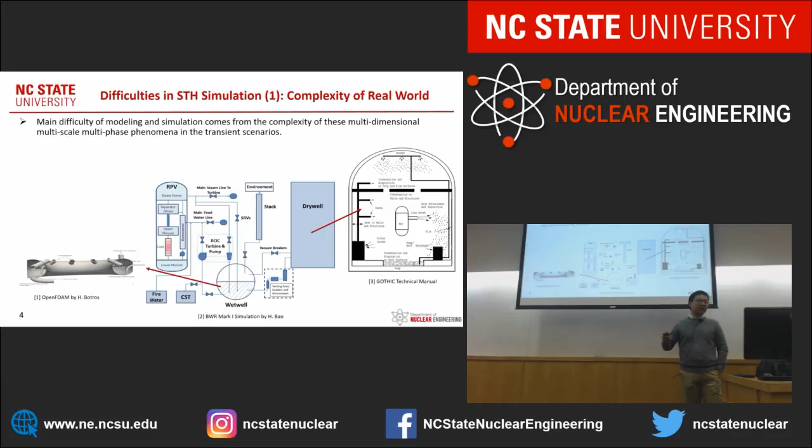As we all know, there are some difficulties for system thermohydraulic simulation because the world is complex. We have different components, multiple dimensional, multiple scale, and multiple phase phenomena in the transient scenarios for nuclear power plants. There are so many phenomena, some of which we have not fully understood. So it's very difficult for people to model and simulate every detail in nuclear power plants.

We know there are some ideal approaches to explore and predict the behaviors in the plants. The first one is that we can build many full-scale facilities to do the experiments, so we can use the experimental data to develop different models, then use these models to make a code and simulate the plant. But actually it's not easy to build so many facilities because there are so many phenomena we need to know - it's not affordable for people to build so many facilities.

So there's another approach called direct numerical simulation, where local information can be fully solved accurately with a very fine mesh, but it's computationally expensive to deal with system simulations because we have so many components and it's a long-term scenario.

So people start to use scaling methods to design different scaled facilities for different phenomena. Based on experiments using these facilities, we generate different models, integrate all the models into a code, and use this code to simulate the full-scale prototype processes. But we know there are some problems generated - scaling issues, because we need to scale down from full scale.

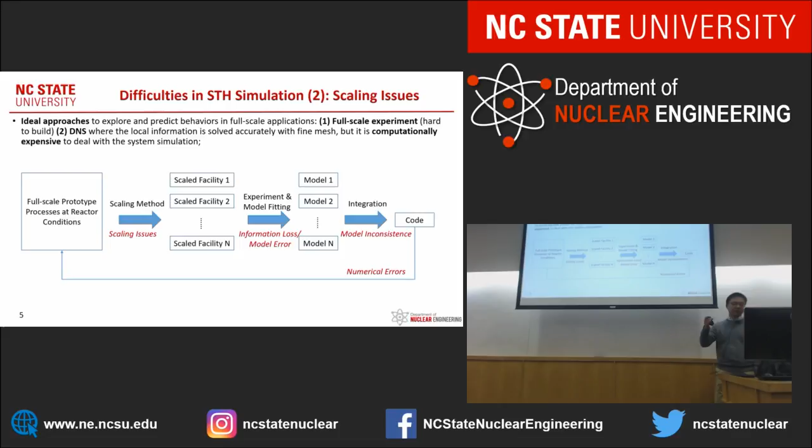So that's one of the motivations to use machine learning to help us deal with all these problems, because it's not easy. There's another problem - the lack of validation data.

Before we try to use the code for modeling and simulation, we need to make sure that this code or model is accurate enough for our prediction. That's why we need to generate validation data to validate the code first.

But normally the validation domain is much smaller than the application domain, because no matter how many experiments you've made or how many cases you've run, the application domain is always larger. If we only change a little bit on the geometry or boundary condition, the application is totally different from the case you have.

So that's another motivation - we're trying to think of another way that maybe we can just enlarge the validation domain a little bit so we can have more confidence in the prediction. And that's what machine learning can help us with.

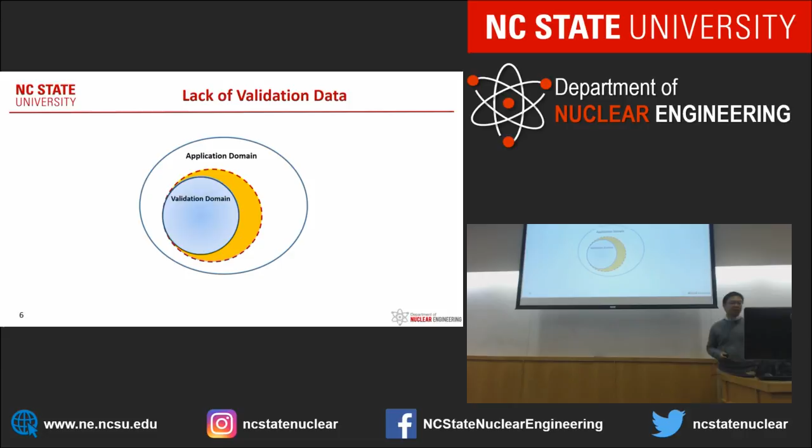We already have different codes for system thermohydraulic analysis. We have lumped parameter codes such as RELAP5, some of you may have experience with it, and also CFD codes such as STAR-CCM Plus, and some coarse mesh CFD-like codes such as GOTHIC.

All these codes play a game to make a balance between simulation accuracy and simulation efficiency. So people have to make a choice between accuracy and efficiency. But we are greedy, we want both.

That's why we need machine learning to help us improve the code, to estimate the error from the code.

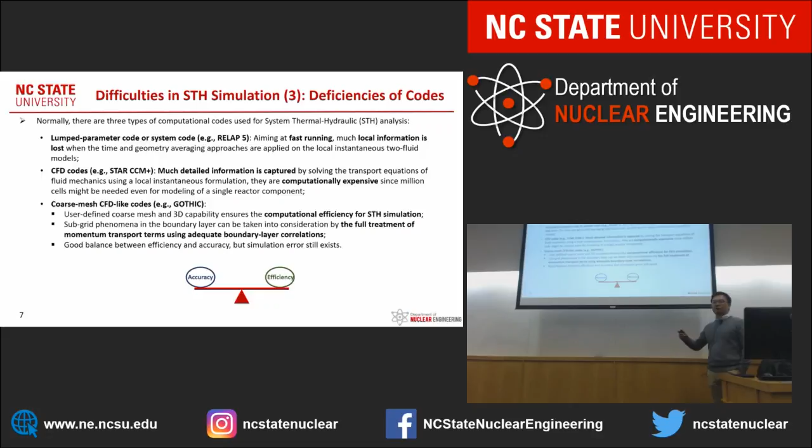When we have a target to simulate, we need to decide which kind of mesh or model we should use. Normally we make a decision based on our experience, but normally it's wrong. So we go find experts about this code and ask them which mesh or model is good for this case. They may give an answer, but they're not sure either.

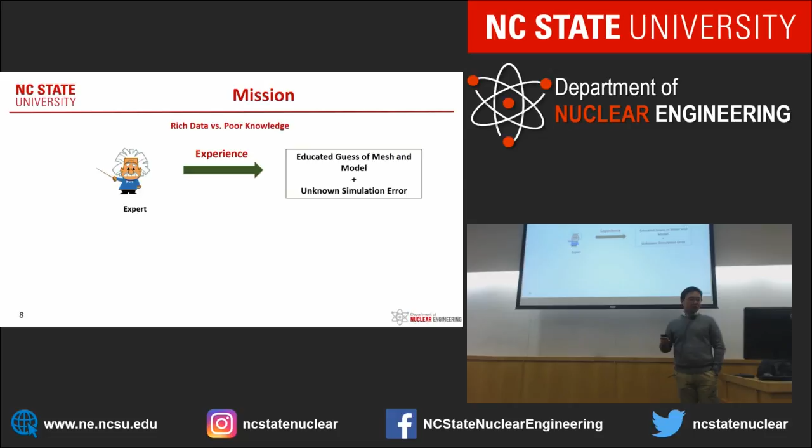So we're trying to find another way - we can directly learn from the data and let machine learning give us an answer about how to estimate the simulation error and give a smart suggestion of mesh and model selection.

I have developed an optimized system called Optimal Mesh Model Information System, the OMIS system. This data-driven framework can help us estimate the local simulation error using machine learning and also give suggestions on the selection of mesh size and model.

So we can let these coarse mesh, low fidelity simulations achieve accuracy comparable to the high fidelity data, such as DNS or high resolution CFD.

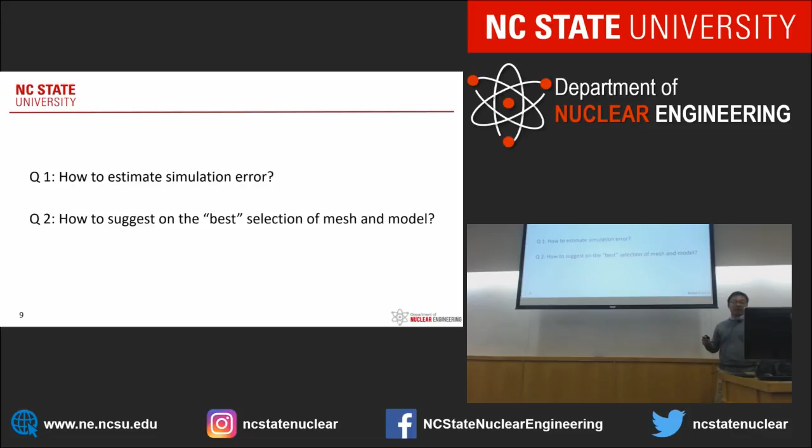So here we have two questions. The first one is how to estimate simulation error using machine learning. The second one is how to suggest the best selection of mesh and model. Let's go to the first one.

Just like what we mentioned before, if we just change a little bit on the geometry or boundary condition, the prediction is totally different from our validated cases. So that will confuse people.

All these changes on dimension, geometry, boundary condition, or non-dimensional parameters can be considered as a change on the global characteristics on the target case, because it's not in detail. It's globally defined.

But when we go to the detail, we may find something similar. For example, for different types of plants, we have different light water reactors, such as boiling water reactors and pressurized water reactors. No matter how the boundary condition or geometry changes, the game inside the core is always the match between the liquid and the vapor.

So we can find the similarity there because it's always steam, it's always vapor and liquid. So based on the global characteristics and the local physical features, we can separate all the conditions into 4 types, which is called GILI, GELI, GILE, and GELE.

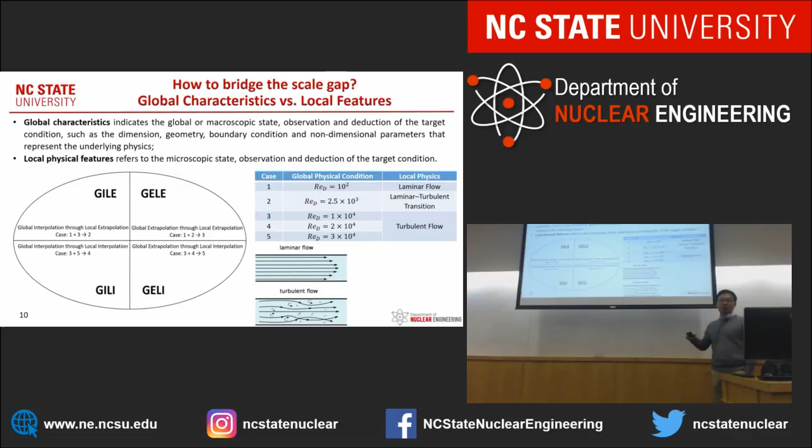So that's one way that we can enlarge our validation data, because we are not just focused on the global characteristics. We can go to the local physical features that can help us a lot.

So in the piping flow example, we have explained the interpolation of local physics. But actually, when we go to the statistics, when we go to the data analysis, we can find another explanation about the interpolation of local physics. From the perspective of data characteristics, because we can identify a set of physical features, local physical features, which can represent the nature or the pattern of the local physics.

So if we can find the similarity between the local physical features of training data and test data, we may find a way to bridge the global scale gap.

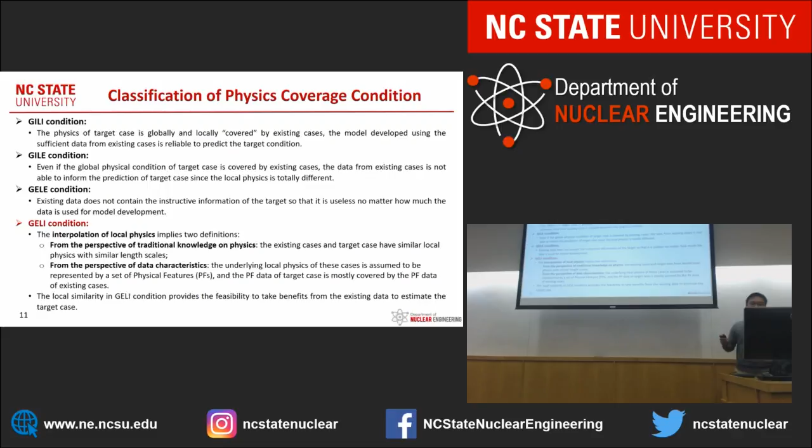So that's a way to bridge the scale gap by exploring the local similarity in the GELI condition. To bridge the global scale gap by exploring the local physics in GELI condition, firstly we need to identify different physical features and build trained data, and use machine learning to find the natural patterns inside data.

This chart is the central idea of this data-driven approach, because in the beginning we just know that the simulation error is influenced by the physics of interest, the model error, and also the mesh error. But because the model error and mesh error are connected by the mesh size, they cannot be estimated separately from each other. So we are trying to define some physical features which also consider the physical parameters, the model information, the mesh size, and then use machine learning to explore the relationship between the simulation error and these physical features.

That's the goal of this data-driven approach. If we can find the relationship between the local physical features and the simulation errors, then we can just insert the values of physical features for a new case. Then we can have a good prediction on the simulation error for that new case.

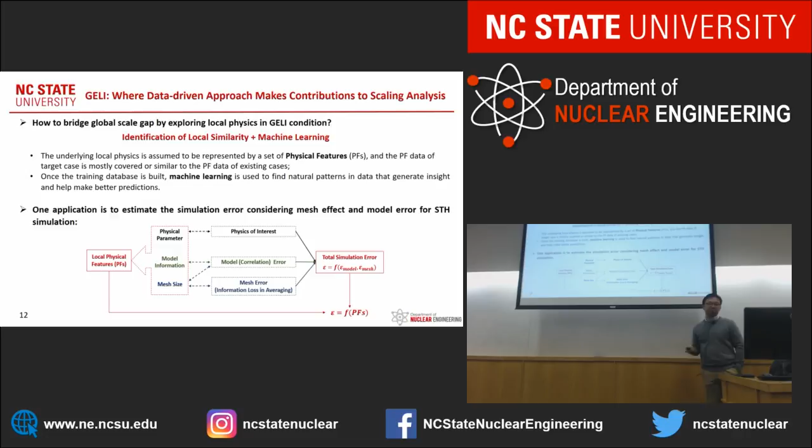Okay, the first step is to identify the physical features. As we said, we need to consider three factors here: the mesh size, the physics of interest, and also the closure models applied. So there are two types of physical features considered here. The first is the local physical parameters, which includes the physical non-dimensional groups and also the parameters involved in the closure relationships. This part enables this data-driven approach the scalability and the additivity of physics.

For example, in the beginning we just consider a very simple case, friction. We can define some physical features for this friction. But when we go further to turbulence, we can still use the physical features defined for friction, and also add some new specific physical features for that turbulence. And of course, when we go further to convection, we can define other physical features related to heat transfer. So that's the first part of the physical features.

The second part of physical features are the gradients of variables, including the first order derivatives and the second order derivatives. We use these gradients of variables. The variables are the quantity of interest, such as the velocities, the temperature, the pressure you care about. The reason we are using gradients, not only the value in the local cell, is that the gradients can include the regional information, not only just one cell, but all the cells.

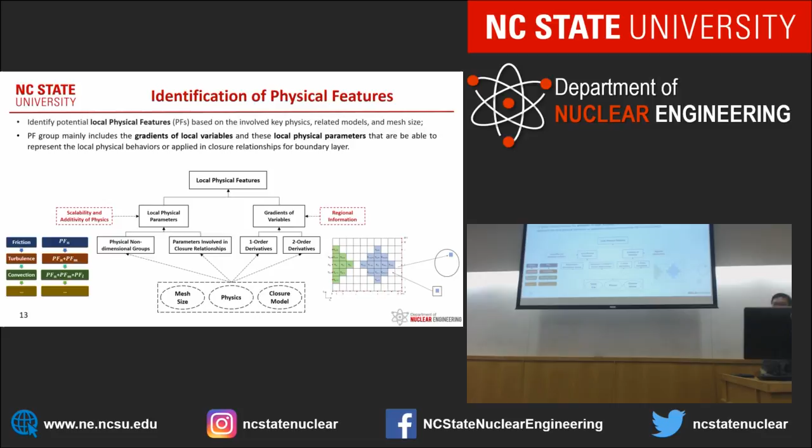All right, so here is a workflow for this data-driven approach. In the beginning, we need to train the error function, so we need to generate the high fidelity data based on some very fine mesh codes, and also we need to generate the low fidelity data from the low fidelity simulations.

For example, we can use some coarse mesh nodalization as a low fidelity simulation, and some fine mesh nodalization as a high fidelity simulation. By comparing these two simulations, we can find the error between high fidelity data and low fidelity simulations. The physics features are totally defined based on the low fidelity simulation. Once we build this training data set, we can use machine learning to train the data and get an error function whose inputs are the physics features and outputs are the simulation errors.

Next step, we need to test this function. We need some more data, which includes the low fidelity simulations and high fidelity simulations. We insert the new values of these physics features into this function, and then we have a predicted simulation error.

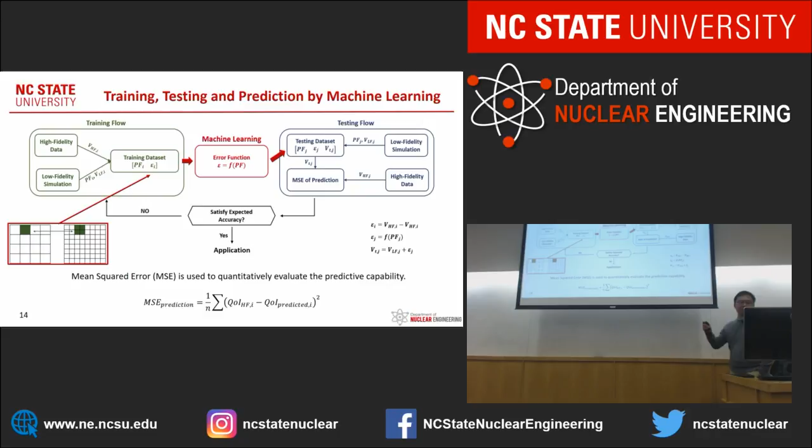Maybe we need more data for training. Maybe we need more physics features. Maybe we need a much better machine learning algorithm for the training. That depends. So that's the workflow and information flow for this data-driven approach.

Next, we're going to a case study. Gothic, which is a coarse mesh safety-like code, is used as a low fidelity simulation. The structure of Gothic includes the conservation equations, the source terms, and the closure models.

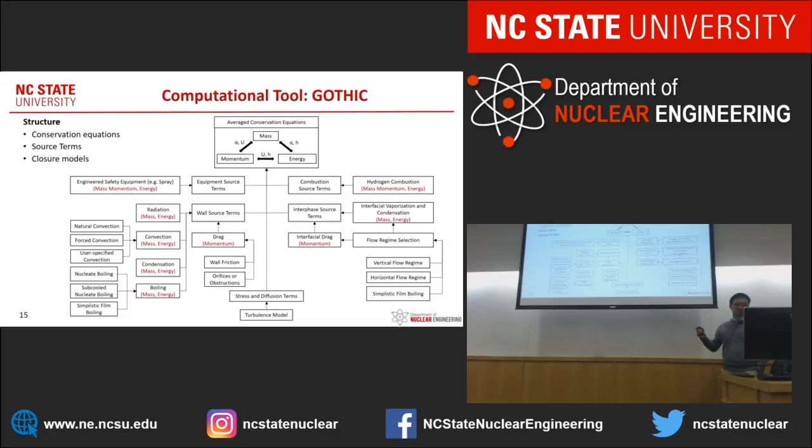Because our case study is about mixed convection, there are three closure models we concern a lot about: the turbulence model, the convection heat transfer model, and the wall friction model.

By reviewing the manual and the correlations, we find that the mesh size will affect the calculations of the model errors, such as the wall distance, the local cell width, the hydraulic diameter, and the wall length. That makes the mesh-induced error and the model error tightly connected.

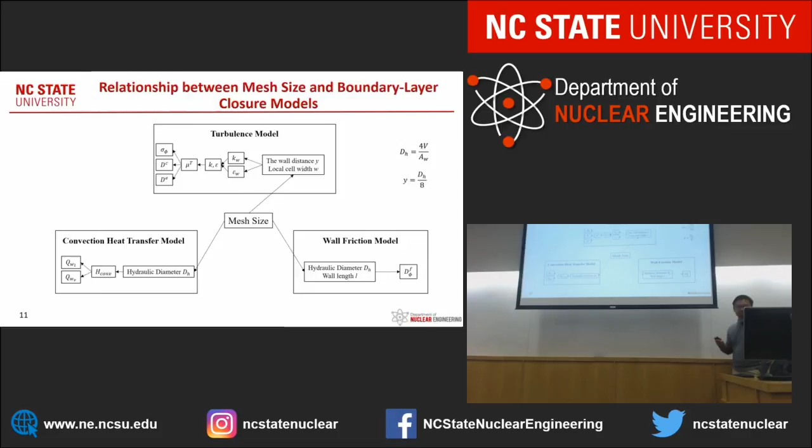The machine learning algorithm we use for this case is feed-forward neural network, because compared to other machine learning algorithms, feed-forward neural network has very good performance to dig out deep nature and patterns. Also, FNN has a capability for deep learning because we can add hidden layers and also neurons.

So it can help us learn from the data and generate insight from the low-level features to the high-level features.

The case study is on mixed convection. Here we have three case studies: the extrapolation of geometry, the extrapolation of boundary condition, and the extrapolation of dimension.

We also have some questions here, because as we know, if we have more data for training, normally the prediction of the machine learning will be better. But normally the similarity between the training data and testing data is much more important.

That's our question. I just said the answer, but that's what we need to explore. The second question is the relationship between the similarity and the prediction error, because we expect that if the training data and the testing data are more similar, the prediction error will be much less.

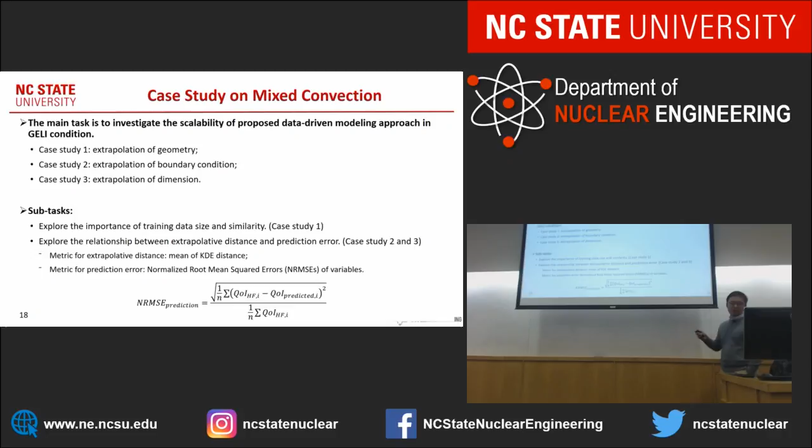The metric for the extrapolative distance is defined as the mean KDE distance. KDE is the kernel density estimation. The metric for the prediction error is defined as the normalized root mean squared error of variables. The equation is right here. Okay, case study 1.

In the beginning, we just have this square control volume. We have the data for this square control volume as data set A1 to A12, with different injection temperature and injection rate at the bottom.

For all the cases, there is a hot air injection at the bottom and a cold wall with a fixed temperature on the top, and here is a vent. So the air will go inside, mix, and go outside.

So this case is what we have for the training, and we are trying to use the data from this square control volume to predict the cases with rectangular control volumes. Here we have two types of rectangular control volumes with different aspect ratios. They also have the hot air injection at the bottom and the vent on top.

So, for this case, first we need to define and identify the local physical feature group.

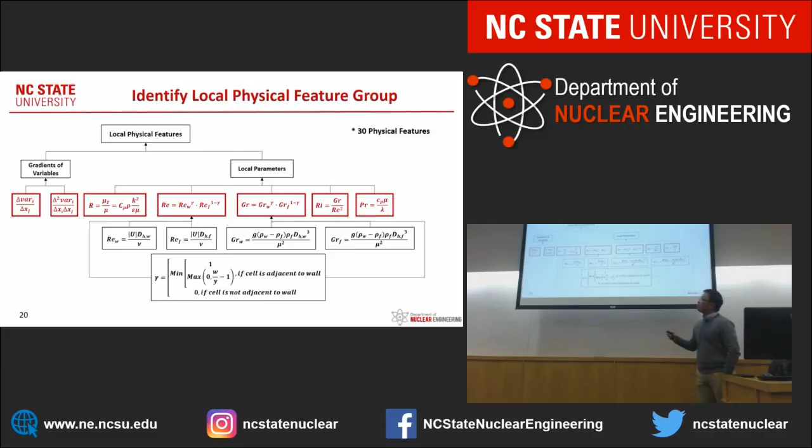Just like what we said, we have two types of physical features, and based on this, we have defined 30 physical features for this case study. All right, here is: for this study we have 4 tests.

The first is that we use all the square data for training to test the rectangular cases. The second, we just use part of the square cases from case 4 to case 10 to do the prediction. The third test, we just use the data from case 6 to case 8 for the prediction. And for test 4, we are using the rectangular cases for the training to predict the square cases.

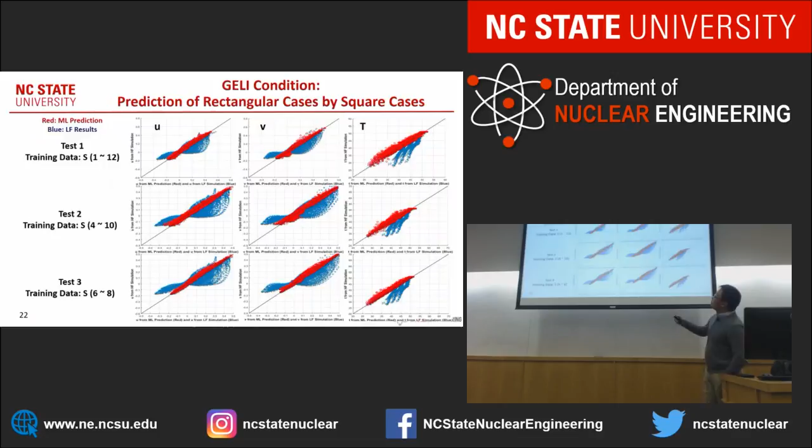So all these cases can be considered as GELI, because globally it's an extrapolation, right? We are using square cases to predict the rectangular case, but locally it's interpolation because the data is covered.

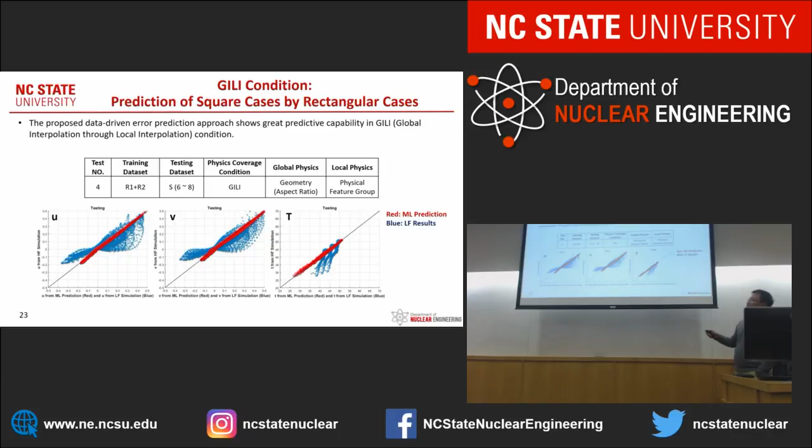So let's go to test 4. We are trying to use the rectangular cases for training and the square cases for testing. So for this case, we can just consider that the testing case is locating in the GILI condition, global interpolation and also local interpolation. So we can find that the prediction from the machine learning is still much better than the original Gothic simulations.

All right, so we can have a conclusion about this case study. Smaller KDE distance, smaller extrapolative distance, we will find higher similarity between the training data and tested data. And of course, we will have smaller prediction error.

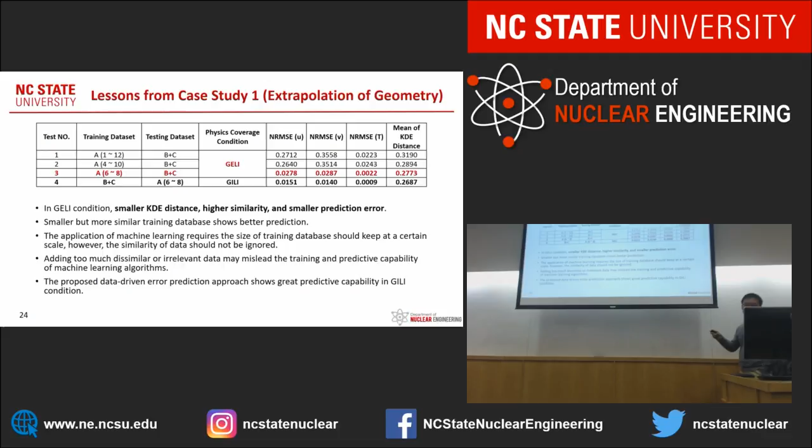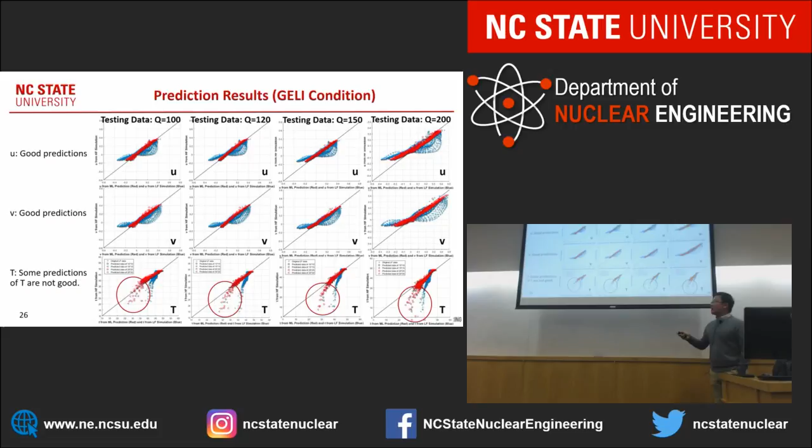But we also find some bad points, which are not as good as we expect. That's because when we go deeper to find where they come from, we find that they come from the top left part, because in this part, the heat transfer is underestimated by the machine learning and also the low fidelity data.

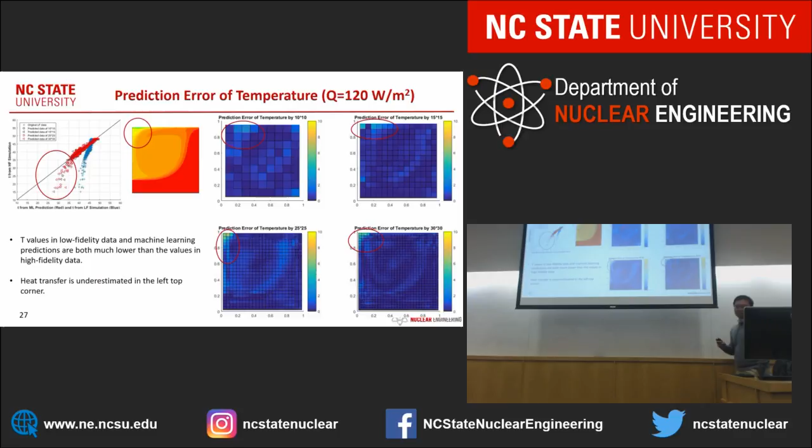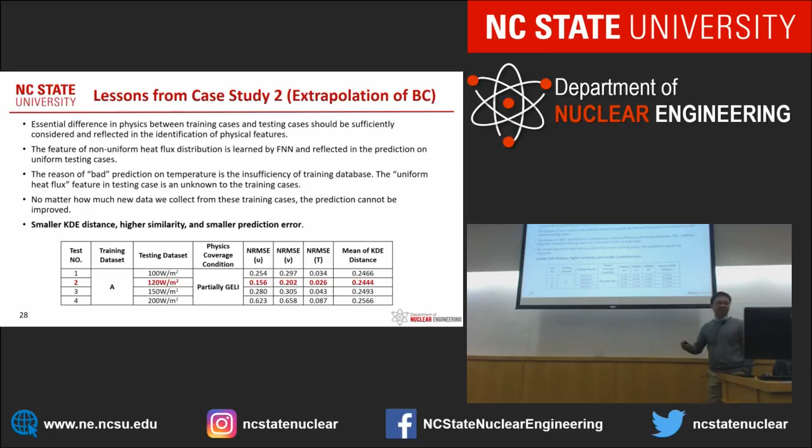So also in this case, we found that if we have smaller extrapolative distance, we can find higher similarity, and of course, we can get smaller prediction error.

Here is case study 3, extrapolation of dimension. In this case study, we are trying to use some small control volumes for training and a large control volume for prediction. They have the same geometry, both square control volumes, and they have the same boundary condition, the cold wall with a fixed temperature. The only difference is the dimension.

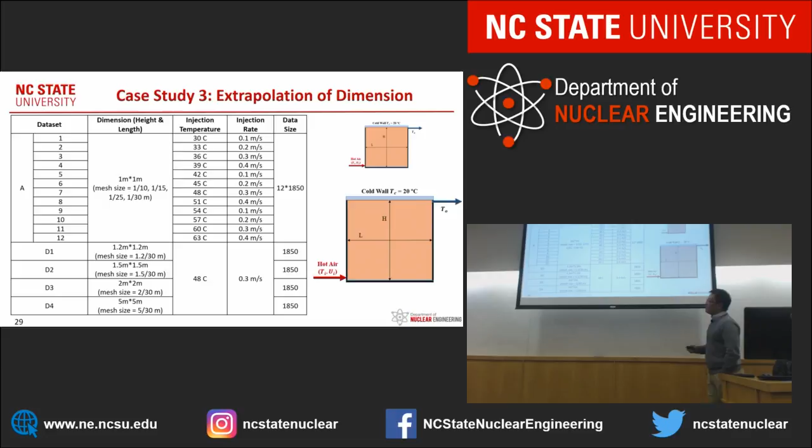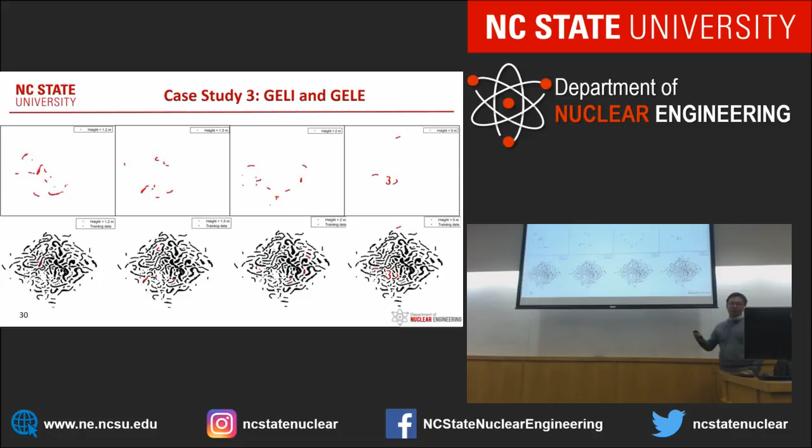But for other cases, we find that the tested data is not covered. For example, for the case with height equal to 5 meters, this part data is not covered, this part not covered, this part not covered. So this case can be considered as global extrapolation, but also local extrapolation case, which is called GELE.

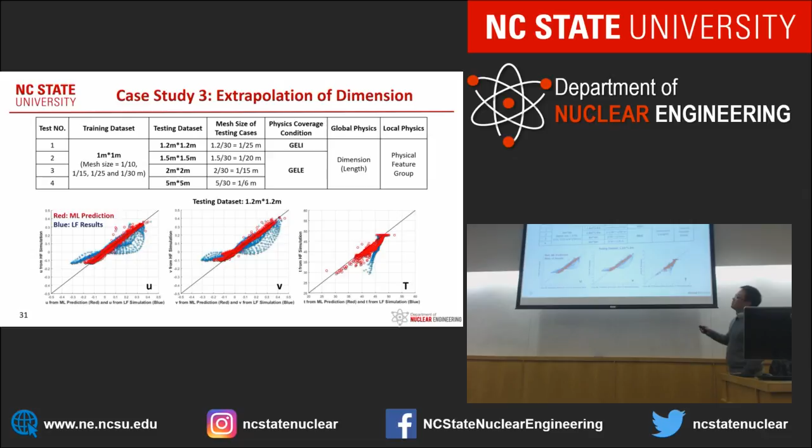We give a definition, a classification here. So for the first case, we put the results here for the testing data set 1.2 meter by 1.2 meter. We found that for this GELI case, the machine learning prediction is still much better than the original Gothic simulation. But for other GELE cases, the results are much worse.

And in this case, we also find that if we have higher similarity, we can get smaller prediction error, as in the test one. But for other cases, the KDE distance is much higher, and then the prediction error is also much higher. So we know that for the GILI or GELI condition, this data-driven approach can work very well. But for the GELE case, it does not.

Okay, so by introducing the whole data-driven approach, we know how to estimate the simulation error. First, we need to identify the physics features, and build the training data set, and use the machine learning algorithm to train the data, and then get an error function. And for a new case, we can just insert the values of physics features, and we can get the prediction on the simulation error.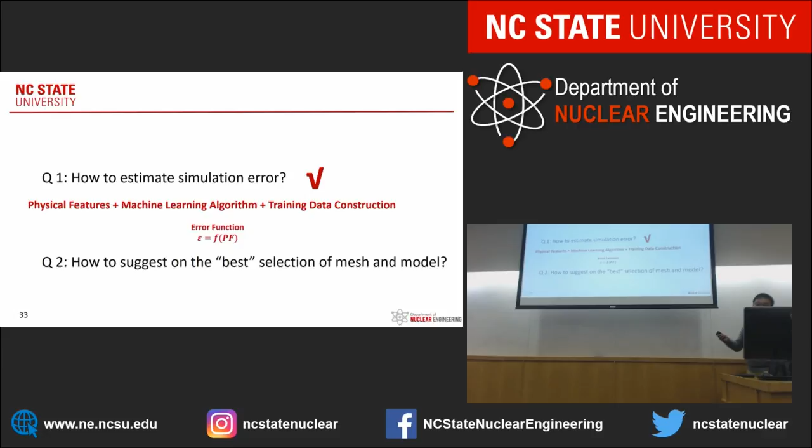So the next question is how to suggest the best selection of mesh and model for your target simulation. So here I develop a framework to find out how to give a suggestion on the mesh and model selection. So in the beginning, we need to know our target. We need to know which component or which phenomena we need to simulate.

And then we need to build some test metrics to evaluate our machine learning model. And then we need to make sure that the physics features we have defined are sufficient enough for our prediction. And then we need to make sure that the machine learning algorithm we have chosen is good enough. And step 5 is to make sure that the training data is very similar or very relevant to the prediction cases. And after all the optimization part, we can give a suggestion on the mesh and model selection.

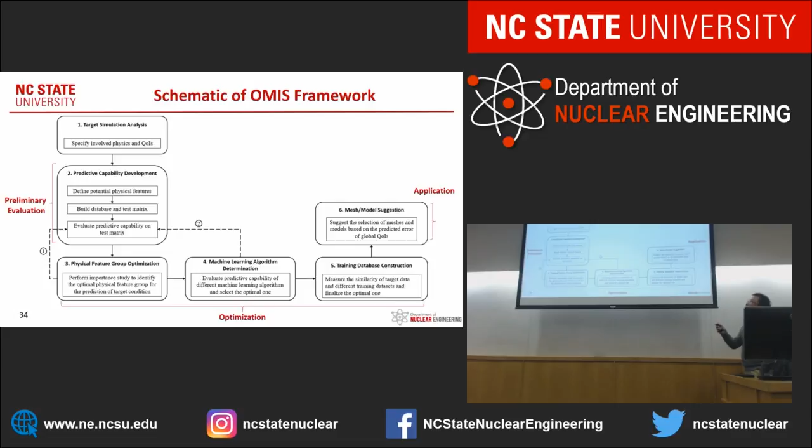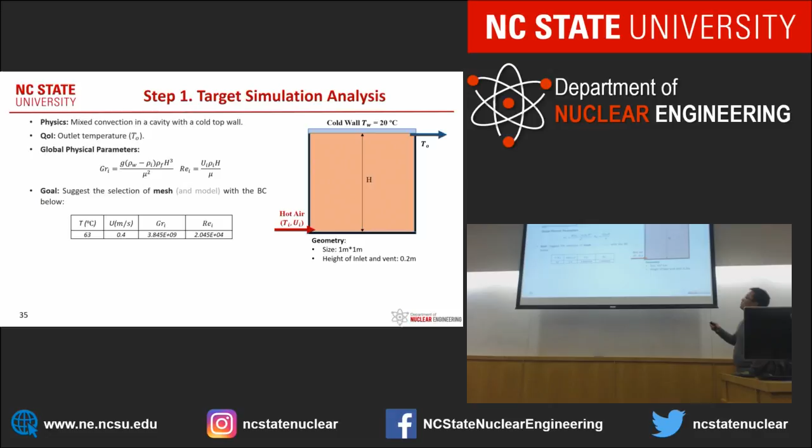So because the time is limited, I will not give too much detail about the framework, but for the case study, I can give some introduction. So if we still have a mixed convection case inside a squared control volume, and we're trying to decide, we're trying to make sure, okay, which mesh size we should use for this simulation, then first we need to know which kind of physics we are getting involved, and which model we can choose, and which mesh we can choose.

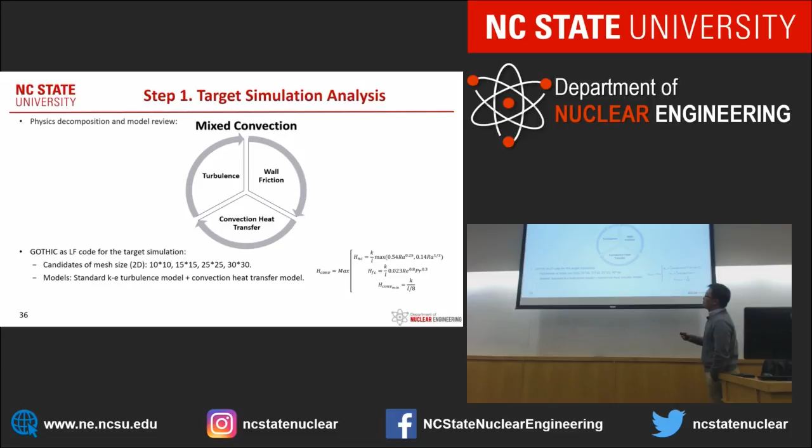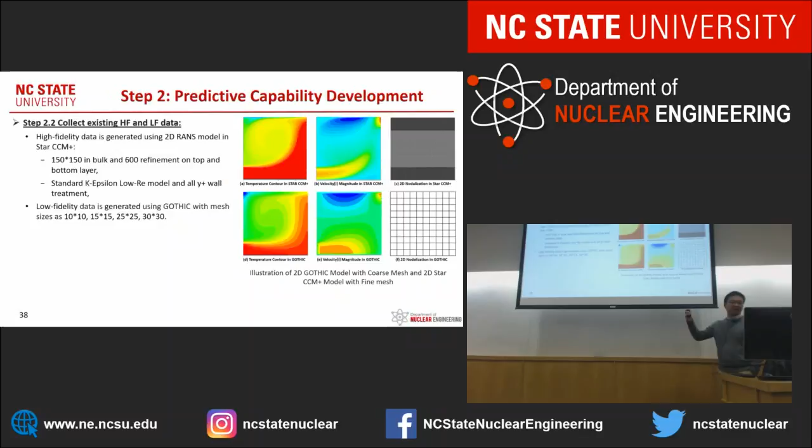Step 2 is to identify the physical features and collect the data from high fidelity simulation and low fidelity simulation, and build a database.

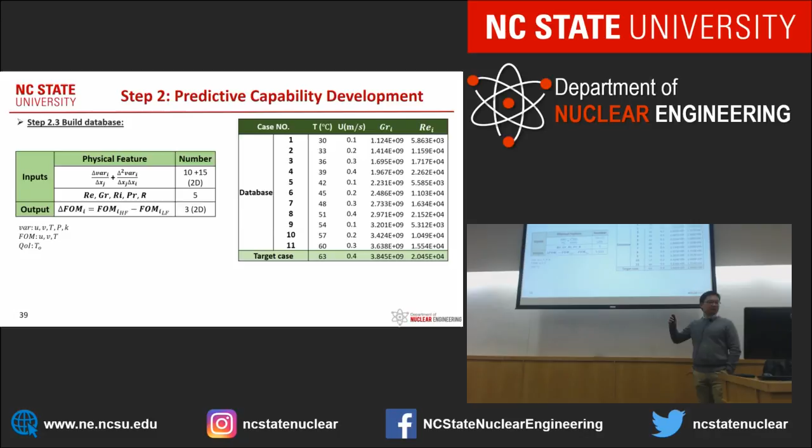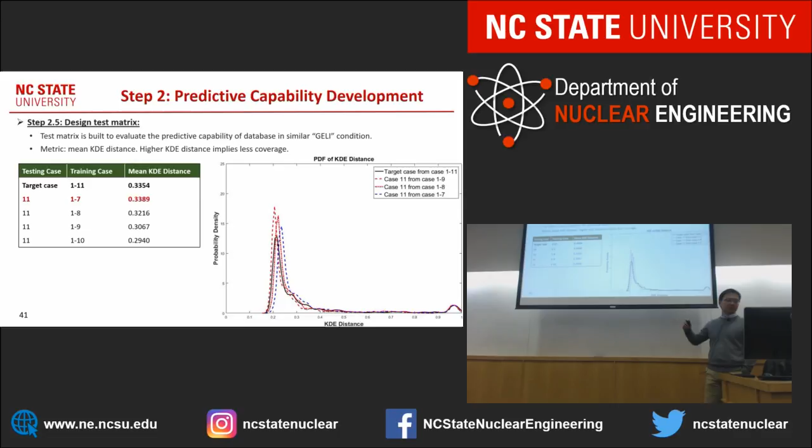We also need to make sure that the machine learning model we have developed is good enough for our cases. So we need to design a test matrix and test our machine learning model and make sure that it's good enough for the application. Step 3 is the optimization of physical features, because sometimes the physical feature is not sufficient enough.

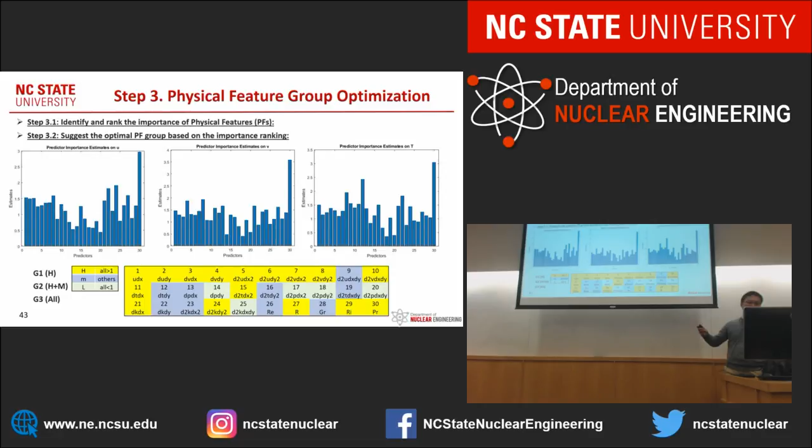Sometimes there are too many physical features. Some of them are not as important as other ones, so we need to pick the most important physical features for our application.

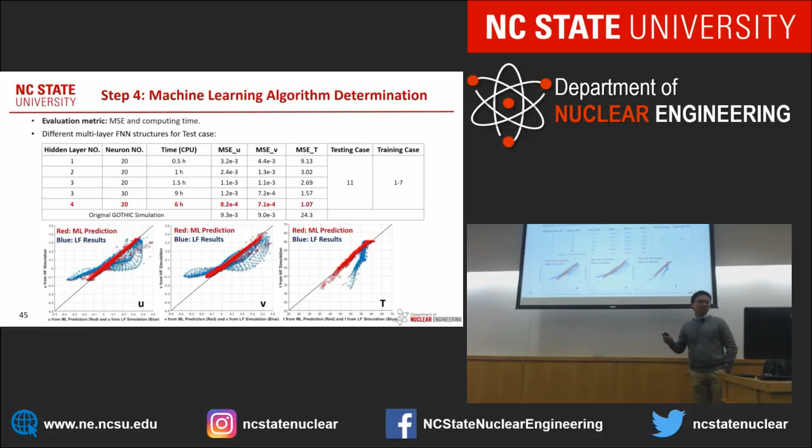Step 4 is determination of the machine learning algorithm, because we need to make sure that we have sufficient neurons and hidden layers for our training. We also need to make sure there are not too many, because it's computationally expensive.

Step 5 is we need to select the most relevant data for training.

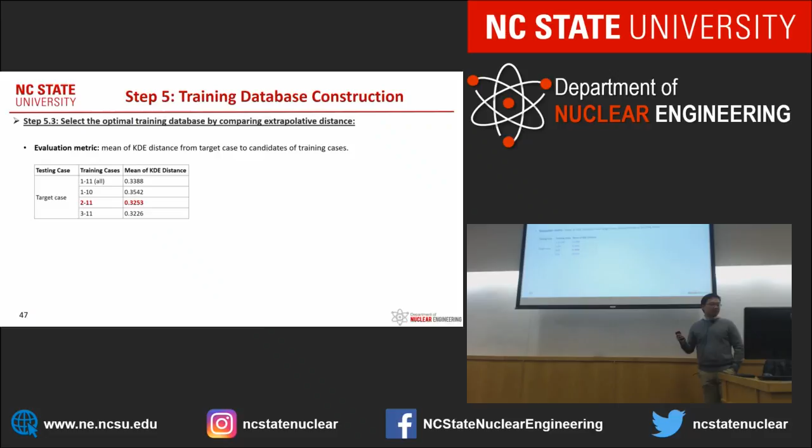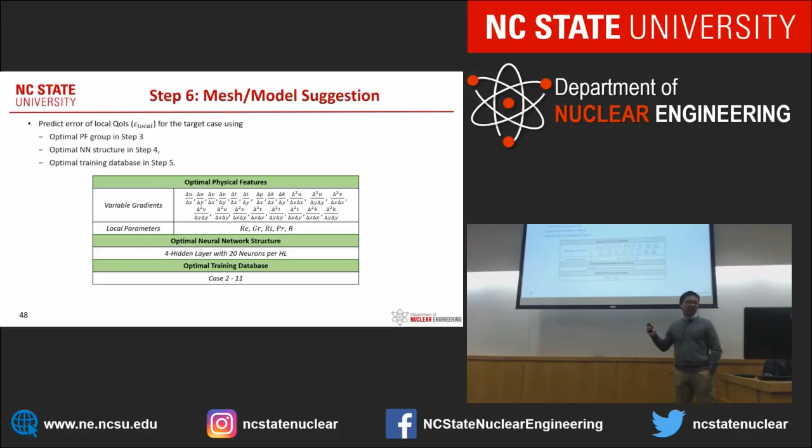And last, we know which physical feature we need to use, which neural network structure we need to use, and which trained data set should be used for the final application. Then we can make a prediction on the target case and check whether our suggestion is right or not.

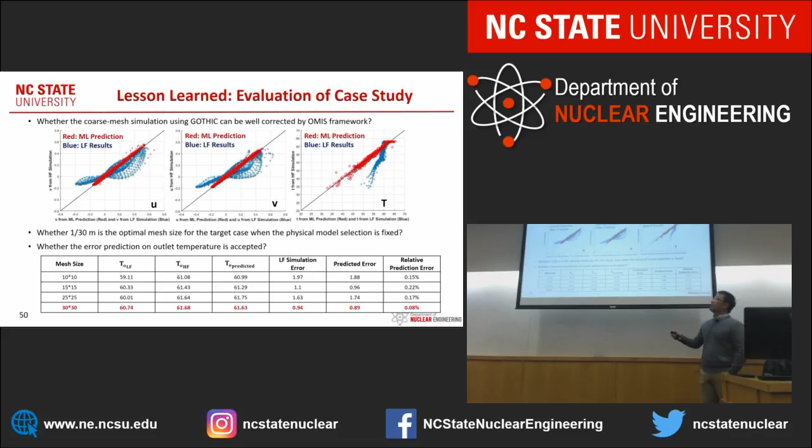All right, so I think that's the end. That's all the work I need to show to you. In this work, I'm trying to develop a data-driven framework to estimate the simulation error and also give a suggestion on the selection of mesh and models.

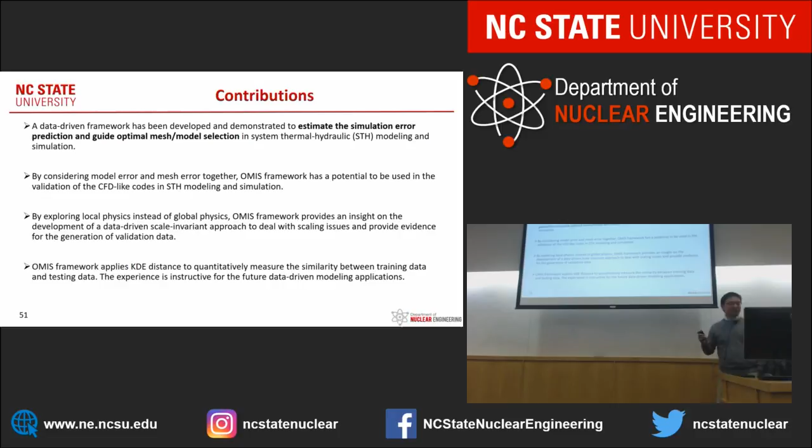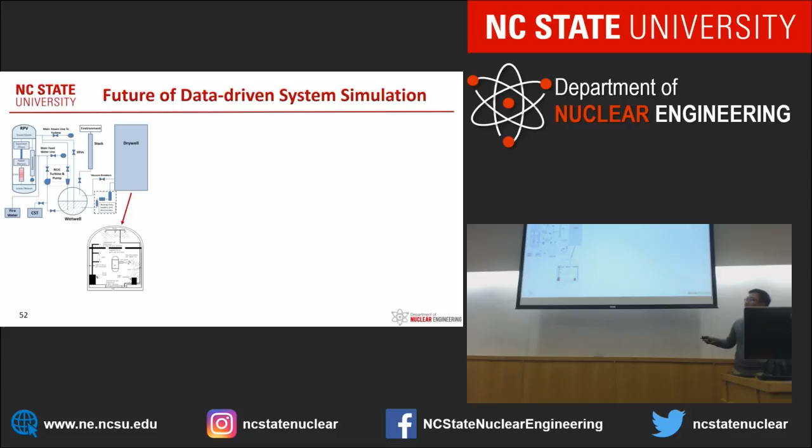So I hope all you guys can take benefit from it, if possible. Here is an image of the future about the data-driven system simulation. Even when we have a very complex plant to simulate, there are so many phenomena inside. If we have data which is easily generated and very simple, but can just represent part of the phenomena inside, then we can collect much more simple, easy running, fast running cases to generate a data warehouse which can help us inform the real simulation inside the plant.

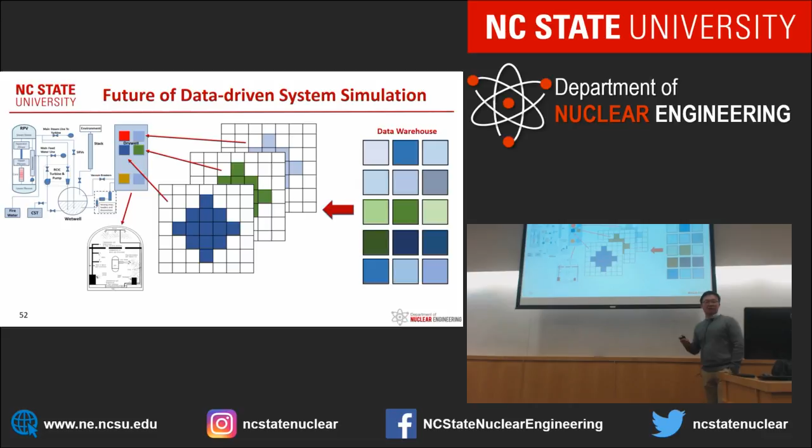In that way, we don't have to simulate the whole plant. We just use the data with fast running codes and easy modeling cases. So, yeah, that should be much easier. And the uncertainty from human beings in the selection of mesh and models can be ignored. Okay, so that's all I need to show. Thank you.

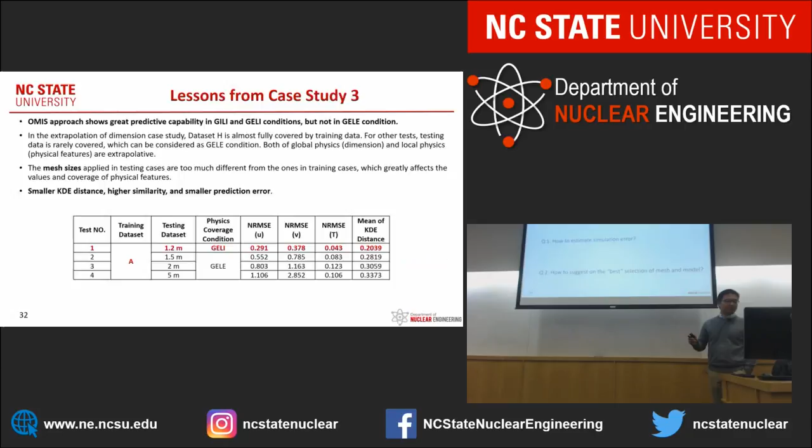All right, why going from rectangle to square is interpolation? You mean local interpolation, right? Yeah, let's go back to that figure so we can explain better.

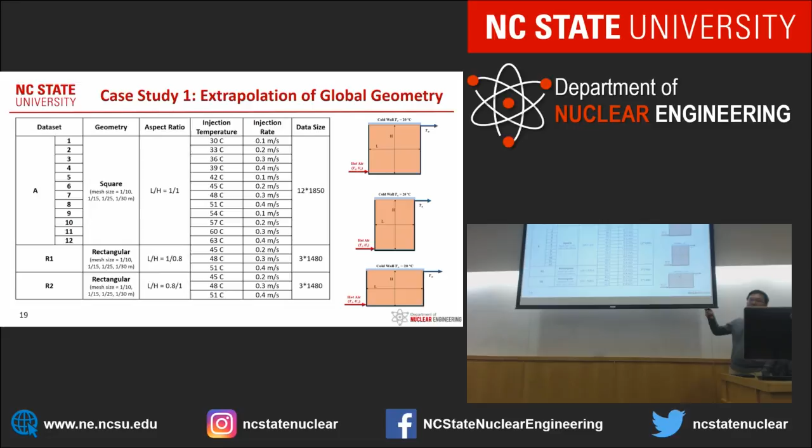Here, the training data case is from the square control volumes and testing case from the rectangular cases. So from the global geometry, it's an extrapolation, right? But if we go to the details, if we just plot the local data, just like the points we showed here, we find that these red points, which are testing data, are totally covered or mostly covered by the training data.

So are you defining the condition after you get the results, or before? You are doing it before, right? Before you get... Yes, first we need the data. We need to run the cases.

All right, yeah, I just look at the faces which I've shot during other seminars. So yeah, I can. Yeah, that's fine. But if you don't have any questions, that's fine.

But I hope this presentation can let you start thinking about how to use machine learning in your own work, because even though my work is about thermohydraulics, maybe some of you are not relevant to thermohydraulics, but the application should be the same. We are doing regression work, we are doing data-driven modeling, we are doing modeling work, we are doing simulation work. They're the same. So, yeah, I hope it helps.

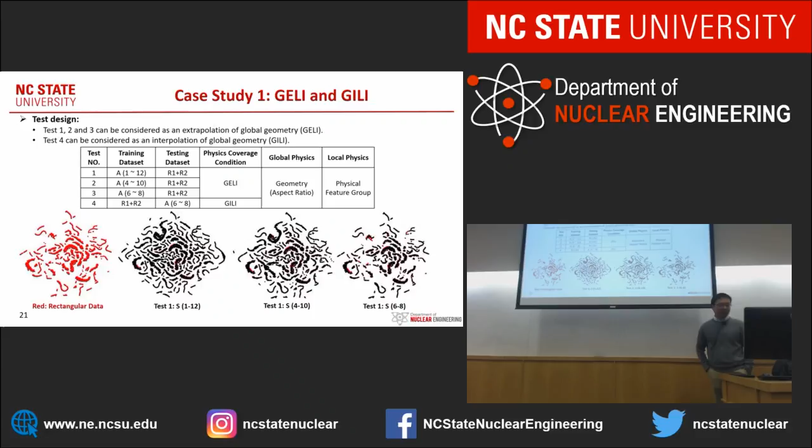Yeah, all right, thank you. Thank you.

Thanks, so where did you say you're going? Idaho National Lab. Oh, cool. Yes. You're going to be working with Bob? No, not Bob, different department. I will go to the system integration department. The department manager is Shannon Bragg-Sitton. Yeah, you know her. Yeah. And because I went there twice for my internship, so they know me a little bit. So yeah, that's why I have a chance to return there and continue. Yeah, good. Well, congratulations. Thank you. Thank you for listening.